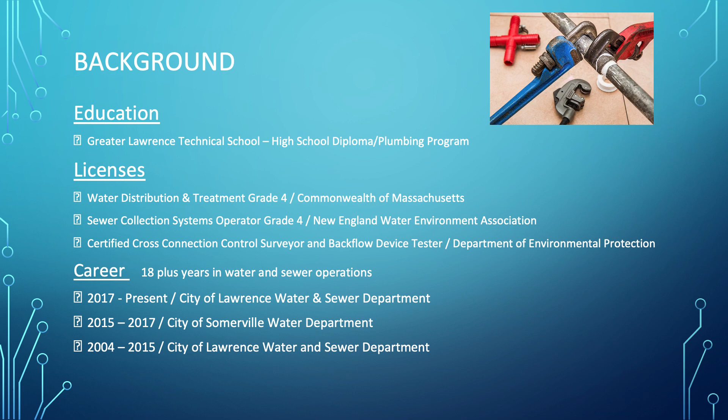So I have 18 plus years in the water and sewer operations. Most of them were in Lawrence. I did spend 2 years in Somerville as the primary operator. And then I came back as the water and sewer construction supervisor. And now I'm in my current role as the water and sewer commissioner.

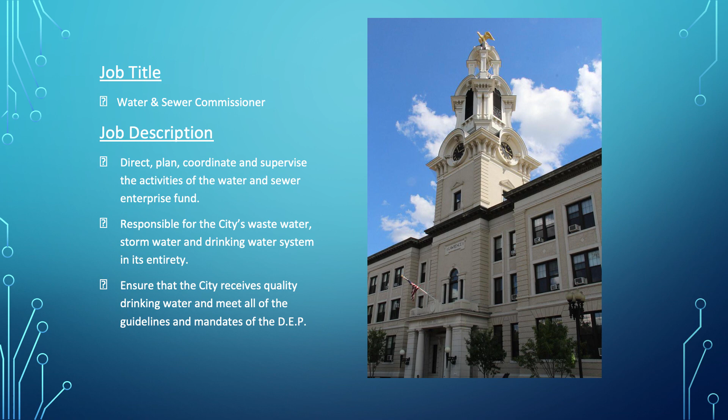So in this job, you direct, plan, coordinate, supervise all the activities of the Water and Sewer Enterprise Fund and anything that pertains under that, which is construction and engineering service, contracts, everything involved with that. Now I'm responsible for the city's wastewater, stormwater, and drinking water system in its entirety. And we ensure the city receives quality drinking water and meet all the guidelines and mandates of the DEP.

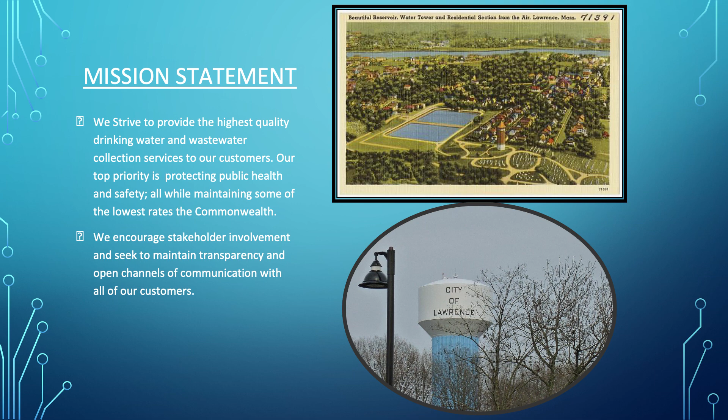So our mission statement is we strive to provide the highest quality drinking water and wastewater collection services to our customers. Our top priority is protecting public health and safety, all while maintaining some of the lowest rates in the Commonwealth of Mass. Even though we did just have a rate increase, we're still relatively low compared to other cities around us. We encourage stakeholder involvement and seek to maintain transparency and open channels of communication with all of the customers. So we appreciate any input that we can get from the public. If there's any complaints or suggestions, we take those seriously.

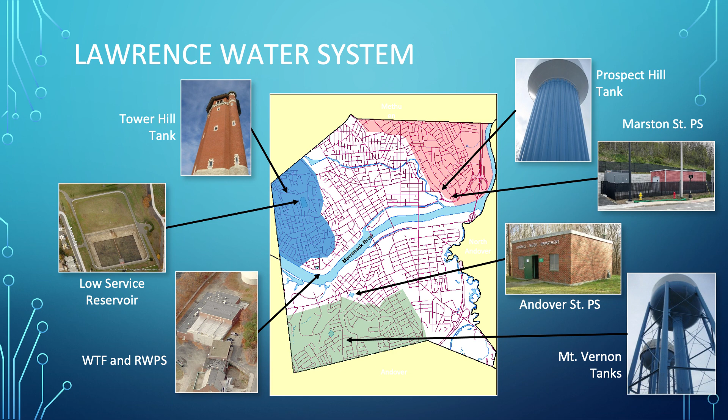This is just an overview of the Lawrence water system. It shows the Tower Hill tank, high pressure service, Prospect Hill tank. We have the Marston Street pumping station that was just redone last year. It's brand new. Andover Street pumping station. We have the 2 Mount Vernon tanks and the water treatment facility with the raw water pumping station. That's where we get the water from the Merrimack River and we pump it up to the reservoir, which is a 10 million gallon concrete tank that's underground at that location. It previously was open and it was 44 million gallons.

The water treatment plant, we produce an average of 6 million gallons per day. We have about a 16 million gallon per day capacity, but we average 6 million. Water is pumped from the Merrimack River to the treatment plant to begin a series of treatment techniques, including coagulation, flocculation, sedimentation, filtration, UV disinfection, and chlorine disinfection. The finished water then gets sent to the clear well for a period of time before being pumped to the reservoir and then to our various points of storage throughout the city that we just talked about.

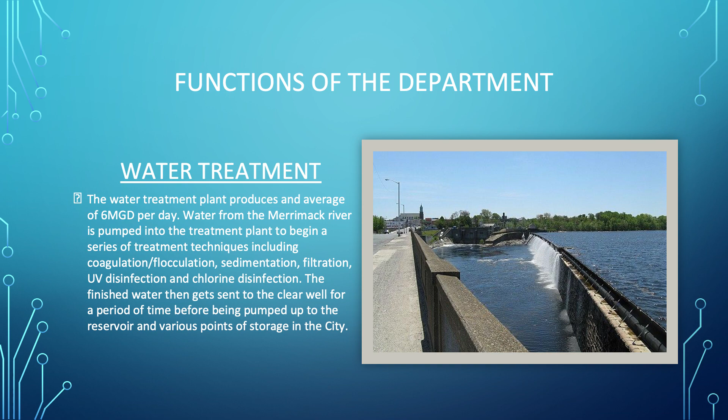So water distribution. It dates back to 1872. We had the Act to Supply Lawrence with water. That was approved March 8th, 1872. The system was built using mostly cast iron pipes with lead water services going into the homes when it first was being built. Roughly 154 miles of water main, and they're cast iron, and then the newer mains are ductile iron. We have 12,500 water services and roughly 1,250 fire hydrants.

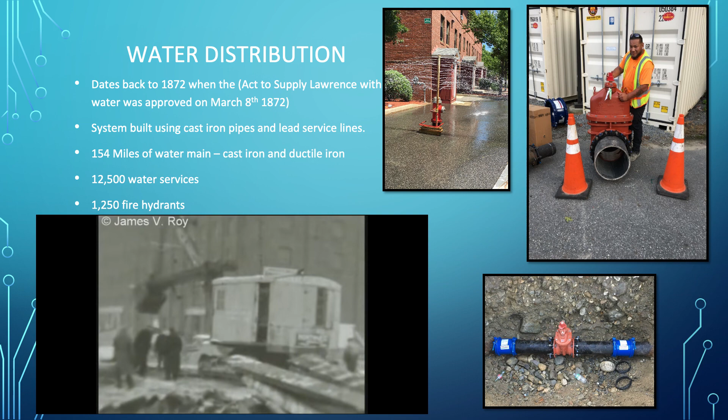And the pictures here, that's Broadway and Water Street. That's one of the old steam shovels they used to use to dig. I believe that was a contractor's. And then these are some various pictures. We have a worker Geo with a 16-inch water gate. Some pictures, 1930 stamped pipe that was from Drake Street on a water main break, and a hydrant that dates back to the early 1900s. That's at Kelly's Furniture. Still there today.

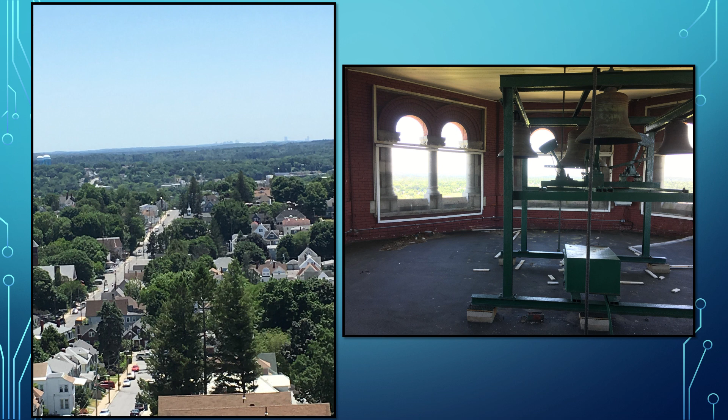These are the views from the water tower. So as you can see, we have the bells from Holland that were imported in 1896 to put up there. And then we also have a skyline view of Boston. It's kind of hard to see, but on a clear day, you can get a good picture of Boston through there. And anybody's welcome to come. If you call the department, we can schedule to have a tour of that.

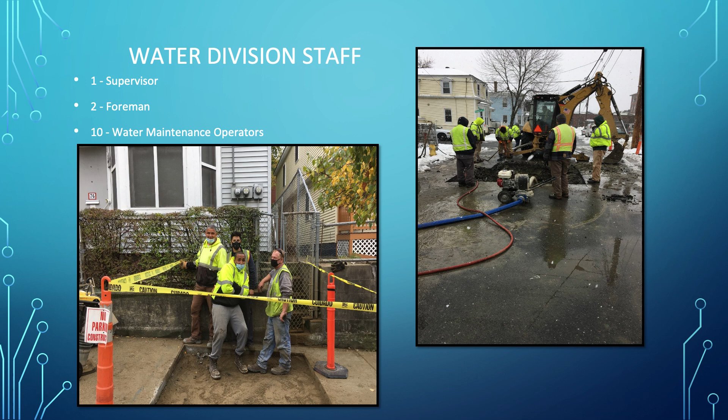That's at the water department, 400 Water Street, if anybody wants to see it as well. So the administrative side of things, we have the backflow testing. There's 3 cross-connection inspectors. They test 1,683 backflow devices that protect the public water system from any back siphonage or backflow conditions. It's mostly for commercial and industrial facilities, lawn irrigation systems, things like that.

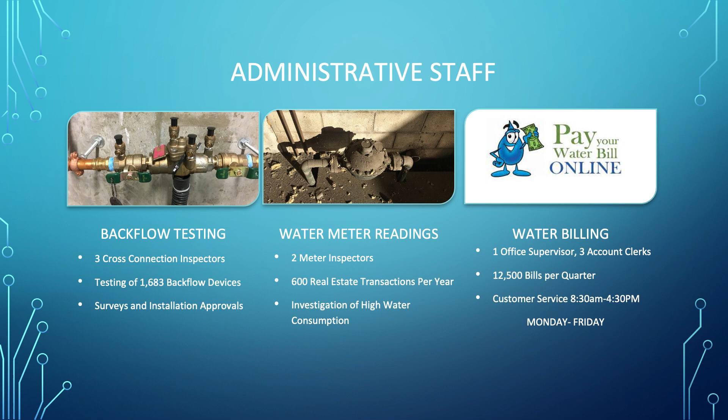Water meter readings, we have 2 meter inspectors, and the clerks do about 600 real estate transactions per year. We also investigate high water usage complaints. So if you think that your water bill is high, we can send somebody to the house and check the fixtures and things and make sure you're not using more than what you should.

So in 2017, when I came back as the construction supervisor, we started a project with lead service removals. We started with a couple hundred, but we realized that some of the records weren't updated, so we went house to house and we checked them. We found some that had already been replaced, but we were able to identify 116. To this day, we did 112 replacements, which was 97% of what we found. So right now, there's only 4 remaining.

The council appropriated $300,000 for this work. We did it all in-house. So we will be going for those 4 soon. Just having a hard time getting into some of the homes.

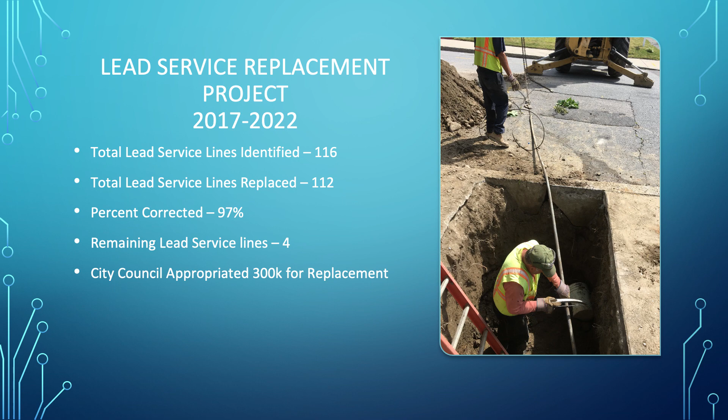So these pictures show that program. The lead service being pulled out. You can see the copper starting to come into the hole. That's a 1-inch copper there. Big piece of lead and then a pile of lead. Very heavy material.

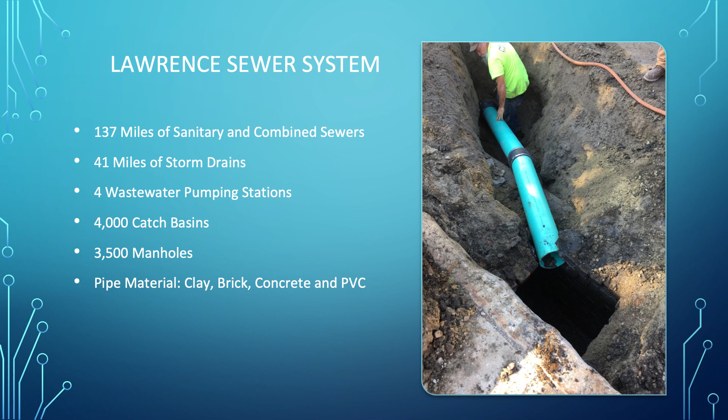The Lawrence sewer system: we have roughly 137 miles of sewer, 41 miles of storm drains, 4 wastewater pumping stations, 4,000 catch basins, 3,500 manholes, and the pipe materials are clay, brick, concrete, and PVC. Sewer division staff, we have 1 supervisor, 1 foreman, and 7 sewer maintenance operators. And that's a picture of one of the operators rebuilding a catch basin, and then we're installing some sewer pipe here.

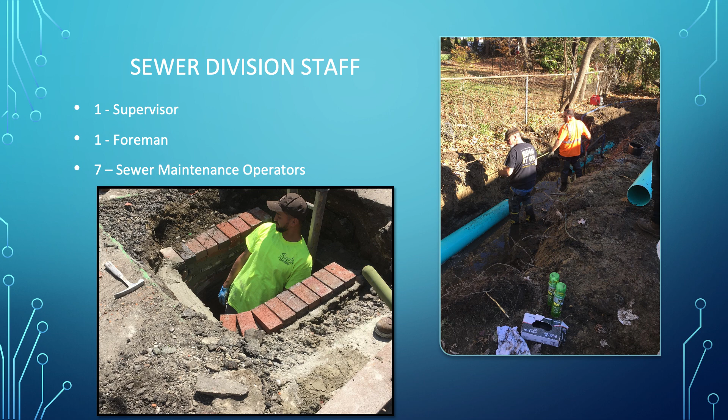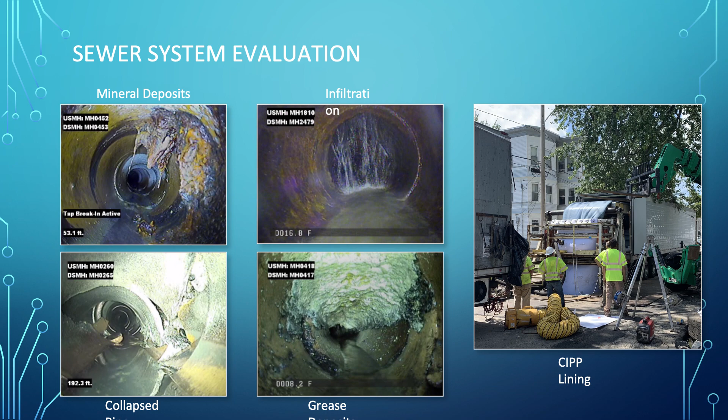So this was the sewer system evaluation study that we began years ago. This gives you a good idea of what the insides of the sewers look like and how we identify areas that we can go and fix. We have a lot of grease buildup and broken pipes, which causes infiltration. Rainwater gets into the sewer, which causes some of the flooding in the city. So we clean and line the pipes if we find things like that. As you can see, some of the water pouring in there.

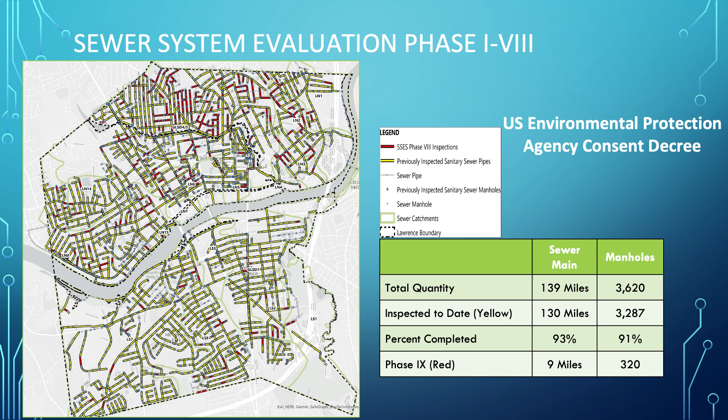So this is just an overview of the study and what we've replaced. The manholes that we've inspected, we did 3,287 out of 3,620. So we're 91% complete with that project. We're just having a hard time on the remaining ones. They're buried at this moment, so we just have to unbury them so we can get the camera access.

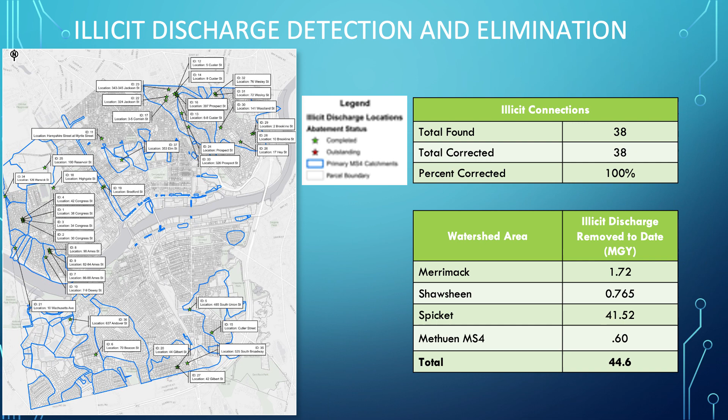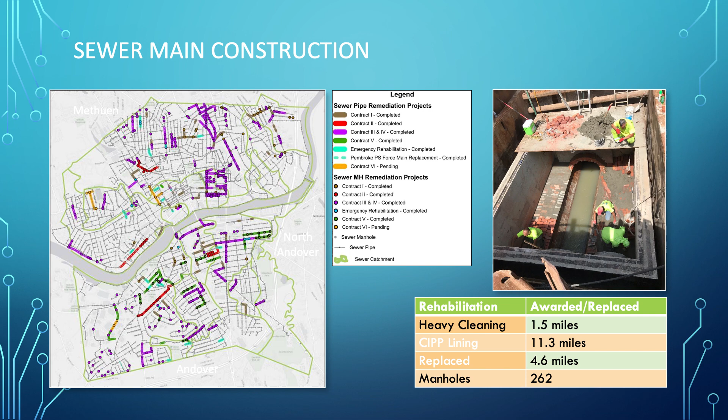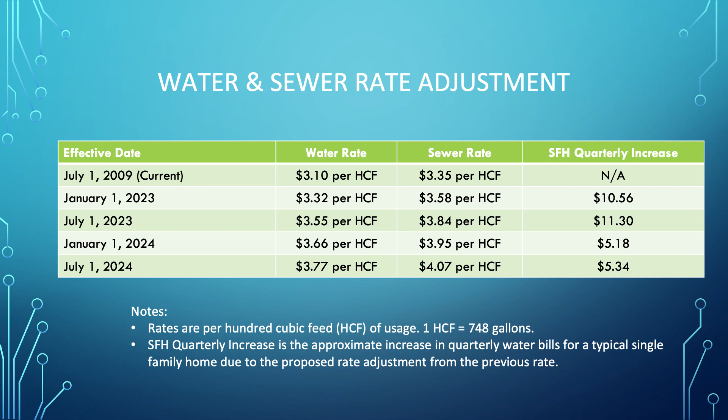The next increase will be the following July of 2023, and they can expect to see an $11.30 increase per quarter, and then $5.18 6 months later, and then $5.34 6 months later. So we try to do it in increments to reduce the shock of getting a high bill, but overall the rates are pretty low.

We're located, as I said, at 200 Common Street, Suite 204 at City Hall. The main number is 978-620-3110. The business hours for City Hall are 8:30 to 4:30, but we're 24/7 with water and sewer. So anytime something comes up, you can call the water treatment plant, fire alarm, or if it's an emergency, you call the police department.

Some frequently asked questions: where does our water come from? It's the Merrimack River. It starts way up in New Hampshire. The water comes down through Nashua, Manchester, all the way down to Lowell, all the way to Lawrence, and then eventually out to the ocean. So it travels a long way to get here.

And what can we do to prevent flooding? A typical homeowner can prevent flooding in their area if they notice leaves blocking the catch basin. If you just take a rake and get those leaves out of there, most likely the water will go down. A lot of times that's the case; we just rake it away and the pool of water goes away.

What can we do to prevent sewer from backing up? We don't want to flush things like diapers down the drain; mostly just water needs to go down. As far as flooding in your home, you can install a check valve on the pipe if you have a basement that always floods. If the water comes back in the reverse direction, the flapper will shut and prevent the water from coming back.

And what is the biggest issue I've faced in my time working for the city? I'd probably say the gas emergency was one of the biggest ones. We had to mark out about half the city, and we were heavily involved in water shutoffs and coordinating that. The other disaster in my time was the floods of 2006. The Arlington district was completely flooded out, and we were pumping out basements 24/7. It gives you a lot of respect for the people who work out there. It's a lot of work to keep up with it, but we get it done.